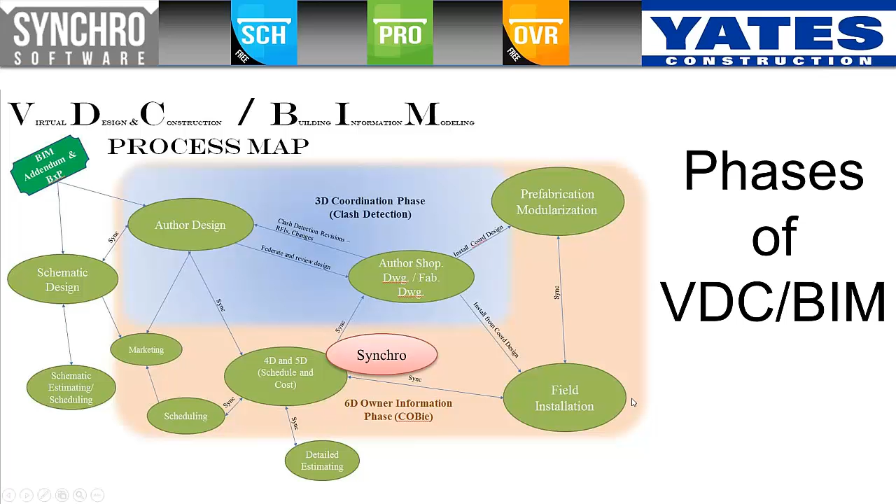If we take all of these parts and pieces, we have our models being produced. I use the BIM Forum LOD specification, and we have these different levels of models. The model isn't all one level of development - you have parts and pieces in there, but as a whole we can think of them at a certain stage of development, knowing there'll be significant exceptions.

Our schedule grows across too. Our estimate grows as the project grows. Our lean practices change as the project grows. And we have different groups of people that are involved as we're going through this.

What we do is try to make as much of this visual as possible. Primarily, the real tools - if we can take the model and schedule and make it visual with Synchro, then people can fall back in and we can get them more involved in the project, get a higher level of commitment, and get more out of them.

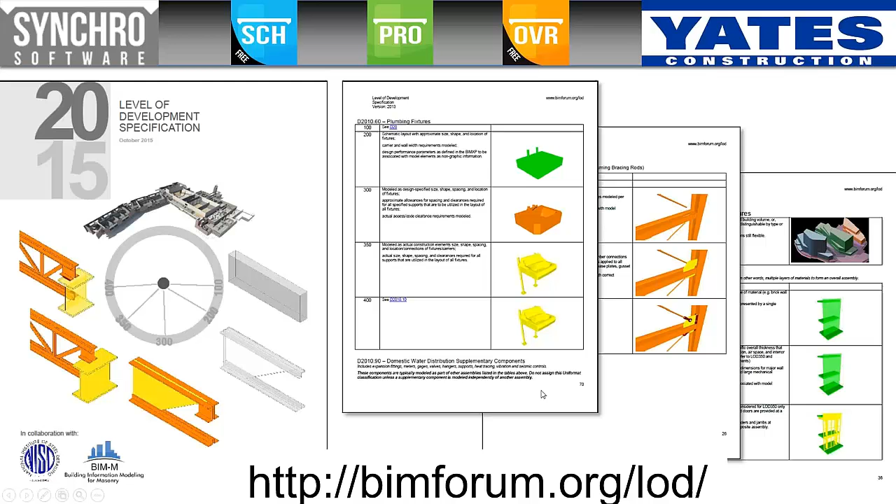So if you're not familiar with the level of development specification, this is what it looks like, and this is where you go to get it. You ought to be familiar with it if you're working with Synchro and these models. As I walk through the different levels of models and development and show you how we use them differently with Synchro, hopefully that will fall into place for you to understand.

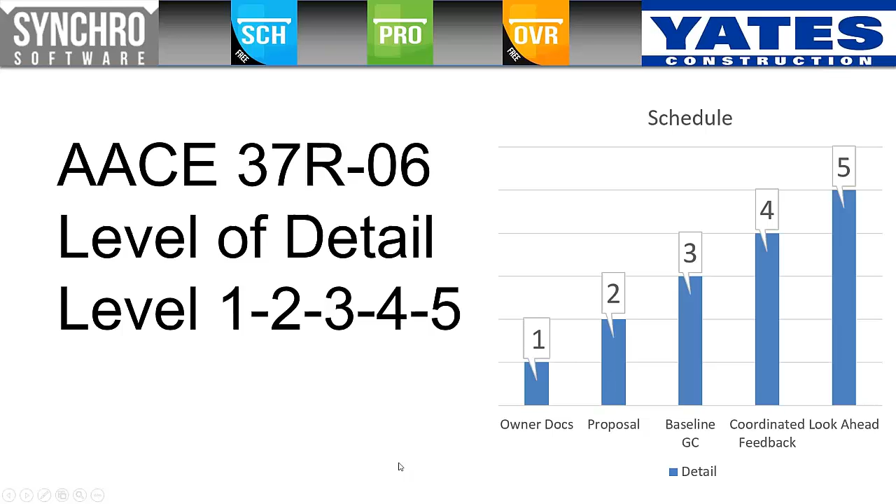As the basis of level of detail of a schedule, I use the AACE 37R06. You can go get this and read it. If you are a scheduler, this is very good to be familiar with to understand how this schedule grows. I have a general outline of about what those look like here, but there's a lot more detail to it that you ought to be familiar with.

That was the familiar-with part, but that's your homework - get out there and read that.

There's a little more detail on that. That's your homework - go read up on that.

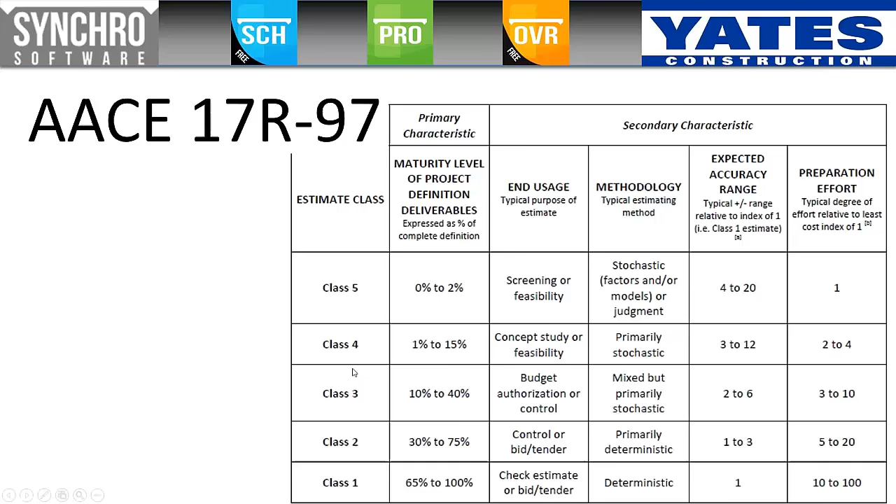The number one cause of project failure is the schedule. You can lose a budget and still make a schedule, but if you lose a schedule, no one ever makes their budget. You've got to have this schedule right, and you've got to be using it.

I'm getting more and more schedulers using Synchro to create and validate their schedules. That's quite the transition in the industry, because there's other software out there people have relied on for years, but it doesn't have the visual component. Converting these schedulers over takes work and effort, mainly because it takes them trying to learn something new. But once they do, the quality of their schedules exponentially changes.

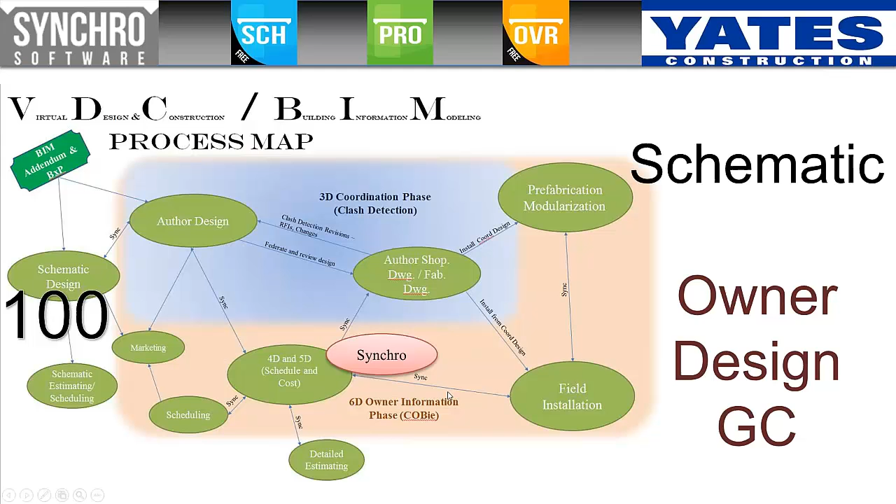Now I'm going to go through these phases and walk through it a little bit. This early schematic, you've got lots of owner, designer, maybe the GC, but we've got to try to understand the basis of the project. At this level, you're going to have a model that looks something like this, they might have dropped it on top of locations.

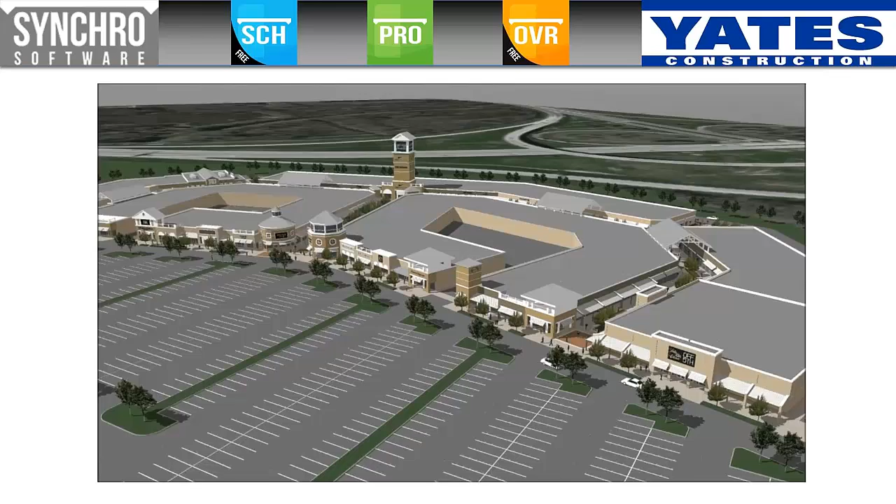Sue, I just want to make sure that video is playing on your side, right? Yes, it is. Great, very schematic. This is probably the SketchUp model, it's an overview. Everything's hollow, it's just an idea of what this is going to look like. That's what this early model is.

At this point in time, wow, we have a model to run with, but when we look at our schedule information, we haven't built a schedule yet. We're just so schematic. All we know is when this has to finish.

Realistically, on that project, we did not know what the start date was until a Tuesday when they said we're starting on Wednesday, because all sorts of things had to come into place. But the whole time we knew it had to be open for Black Friday, and phase one had to finish on the 15th of July, and the other phase had to finish on the 15th of August.

Otherwise, who cares about weather, who cares about delays, strikes? None of that can make a difference. If this project was not open for Black Friday, it doesn't work and everything falls apart.

So you hear people talk about maintaining the schedule so you can get your weather delays. Lots of the projects we work on, yeah, it'd be nice to take a weather delay, but you can't do that to the owner, you just have to figure out how to make it. So at that LOD, you have a level 1 schedule, and there's just not much to model, so I'm going to cruise on past that.

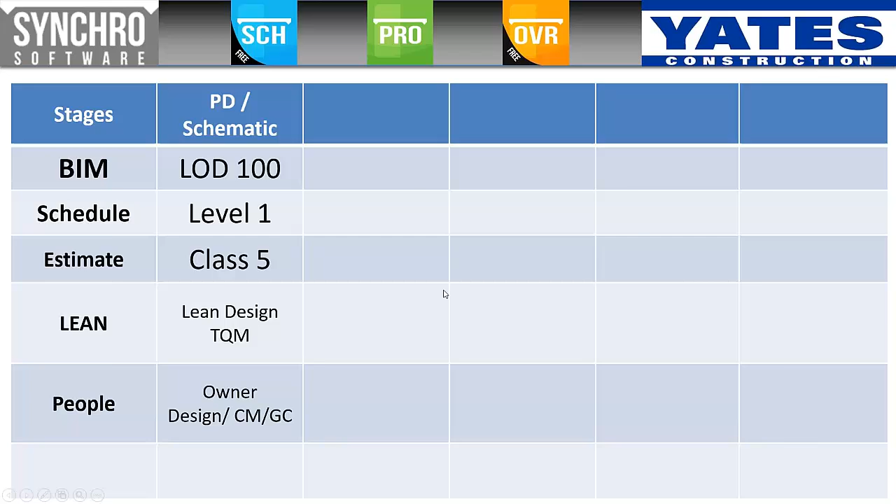This is kind of how everything is fitting together right there, just so you have an overview, and there's a summary. Now let's bump up to 200 to 300. Now at this stage we're authoring the design phase, we're going to have a big mix of models. The real idea is this is a good idea of just kind of a sample of what these design models look like.

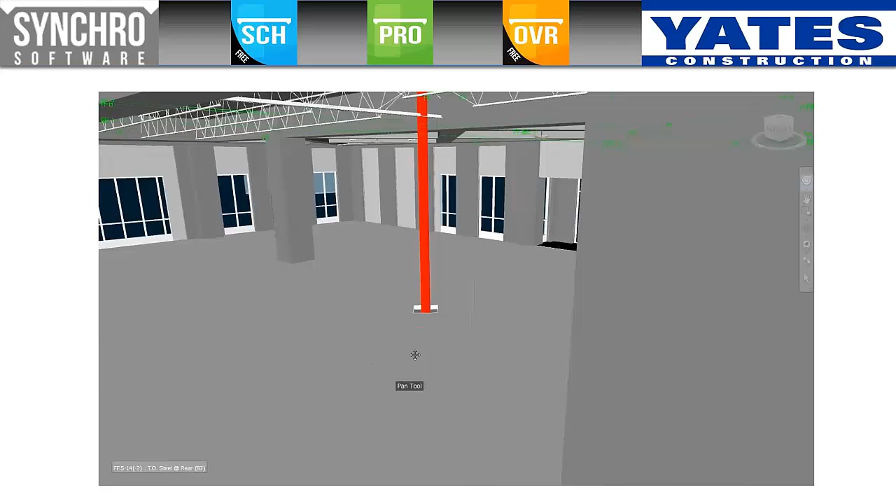These are federated. I've pulled them in. These are different models, getting them from different sources. We try not to create these models ourselves. I want this from the architects, from the engineers, from the people producing the information. Yes, we do create this sometimes, primarily to use with Synchro to create our 4D.

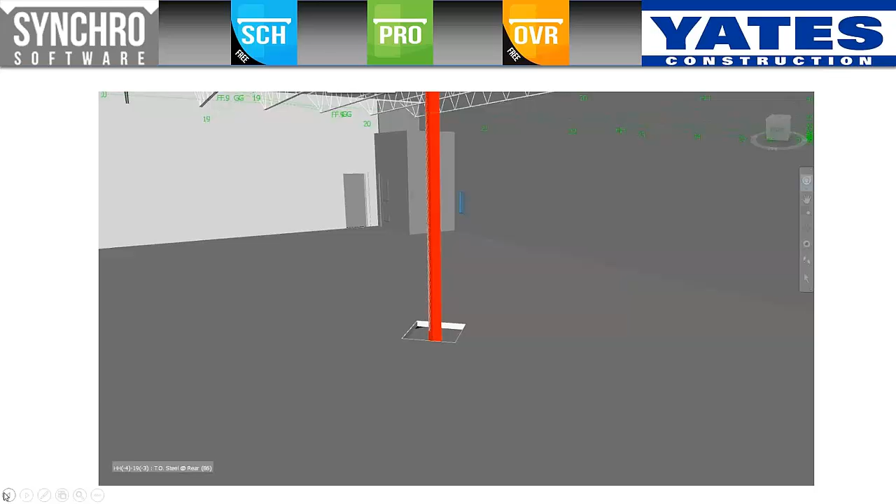Okay, at this page we've got maybe a level 2 bid schedule, 42 line items, pretty simple really. Not a lot here. You see lots of start to start, finish to finish relationships. Very simple schedule - we can't build to this, but it gives an explanation of how we're going to proceed on the project.

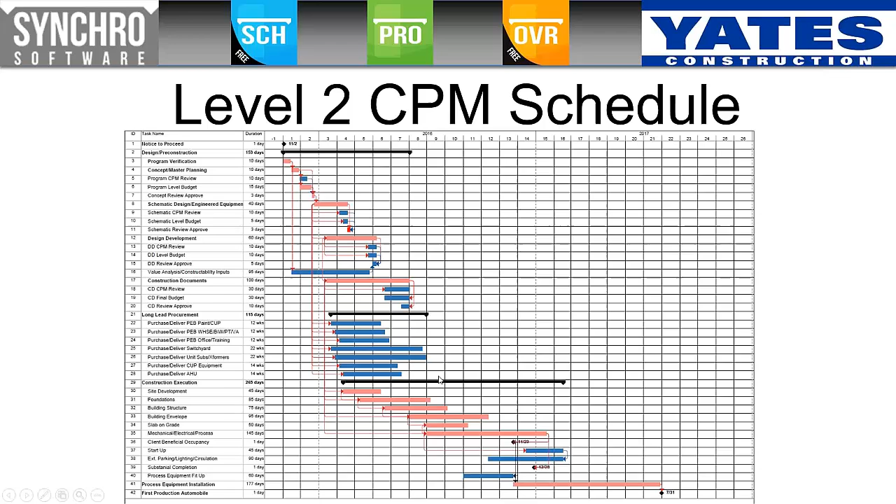Now we also at this phase will be dealing with a level 3 CPM schedule. So on a 50 million dollar project, we can have 3,000 activities - a lot going on. It's going to be broken out by area, phase, location. That's exactly what we're working with and how we're pulling it together.

Okay, and it's best if we can actually get this created in Synchro with the models. I wish I could tell you we had that on 100% of our projects - we're not there yet, we're starting to do that. But lots of times we're still creating the schedule outside and then pulling it in. I hope to change that soon. But if we build it here, it's just more efficient and better.

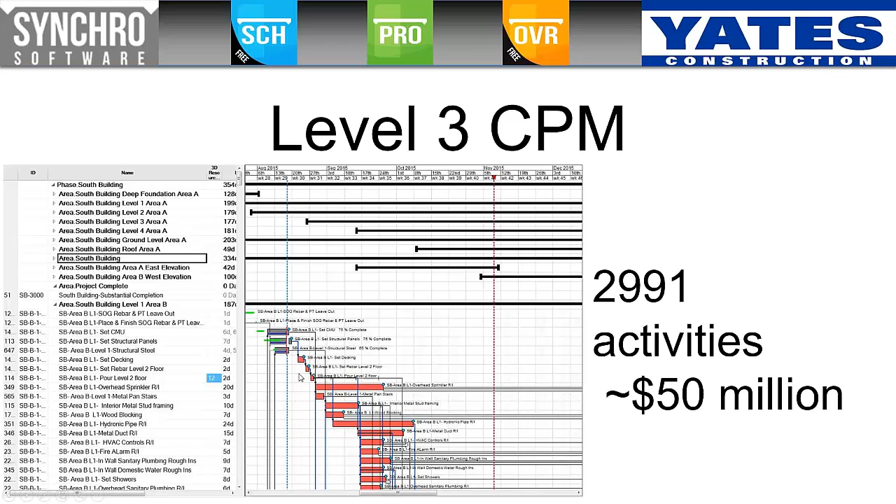All right, so here's a sample of what it looks like. This is kind of a lot of LOD 200 here, not a lot of definition in the models. Part of it is because there's so much remodel, and we don't have some models to work with.

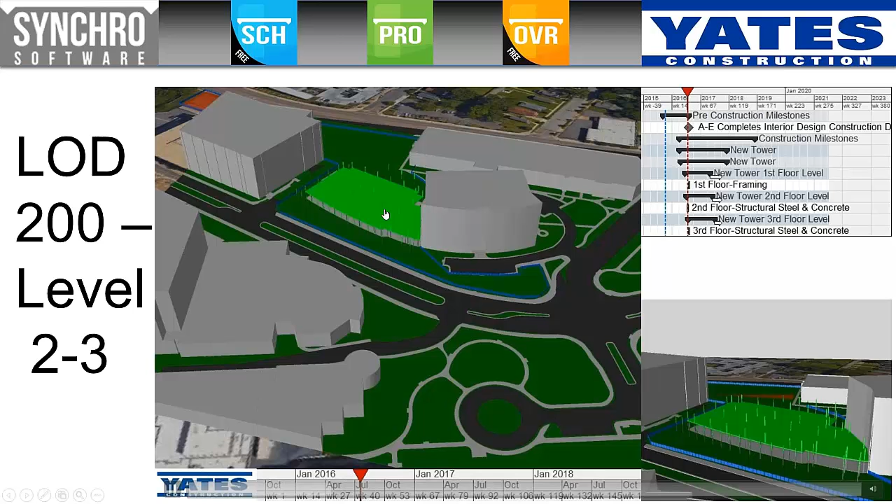And we've taken that level 2 to 3 schedule. It's level 2 on all of the finishes. It's actually a level 3 schedule on our floor slabs and our columns - we have a fair amount of definition there. But later on you'll start to see long bars with finish to finish, start to start relationships, instead of the finish to start relationships we associate with the level 3 schedule.

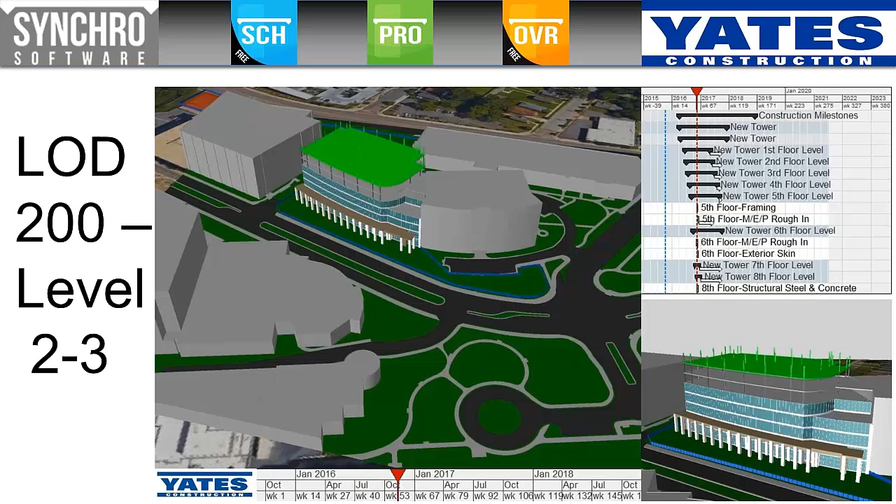And so what this does for us and gets people involved is now the owner is seeing what the schedule looks like. They start to understand dates, they start to understand how it's phased. When I send the schedule out to contractors to bid with and they know the phasing and timing of the project, we have a much better understanding.

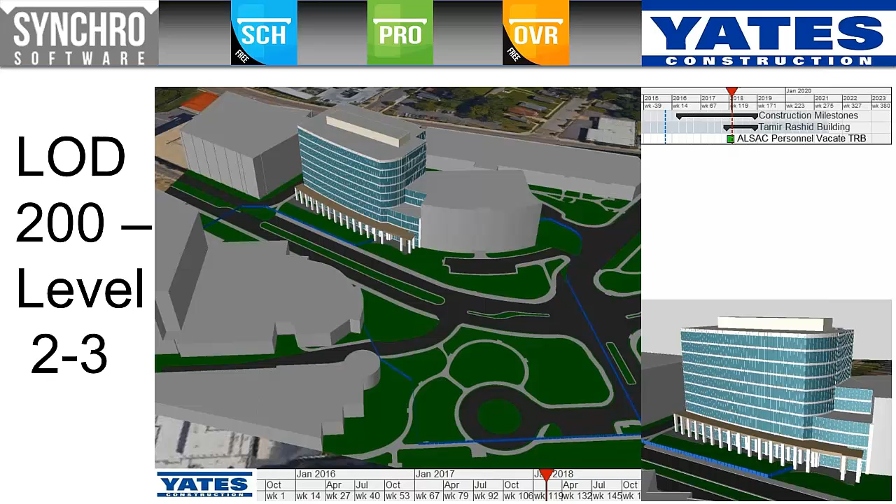And that better understanding means that you get better pricing, less contingency, less risk. They know that we're going to deliver on time and we're not going to accelerate them later on because of someone's lack of planning. We're going to pull everything together.

Being able to see this and understand the schedule, and then, like was pointed out earlier, send the file out there, filter and sort it, let them look at their stuff. The best possible scenario is we send that out there and somebody comes back and tells me it's wrong.

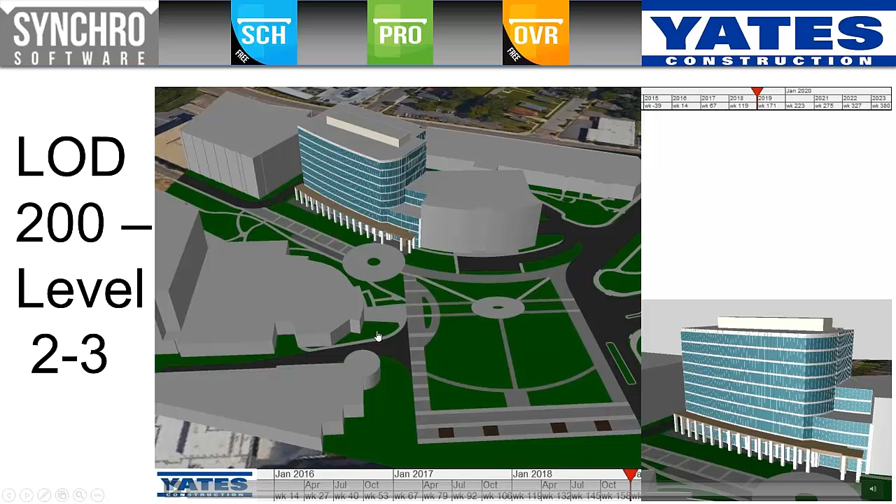Because I want to know that there was a mistake in it. I am not a perfect scheduler, and none of the schedulers that work with me are perfect schedulers. And the more people we have looking at it and they come back and say 'man, that's not going to work' - thank you for letting me know, and then get it fixed. That's the hardest mentality to change among people, is they're scared of someone pointing out a mistake. Once you can open that up, it goes a long way.

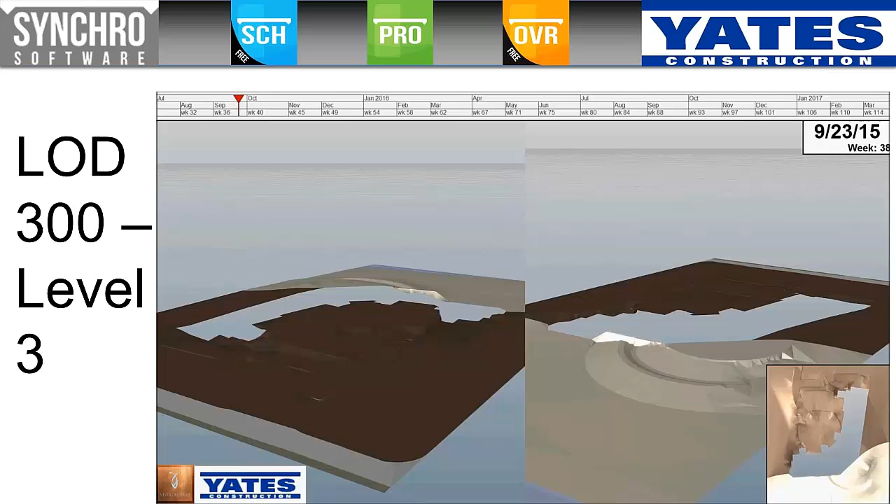Here's another sample project - being able to come here, show two views, have an early schedule, let people see the flow of it and how it looks. Now in the last one, we actually had the bar chart going, there was more detail there for people to work with. This one was more of a visual, different group - more for the owner and some others, and the bar chart wasn't as necessary.

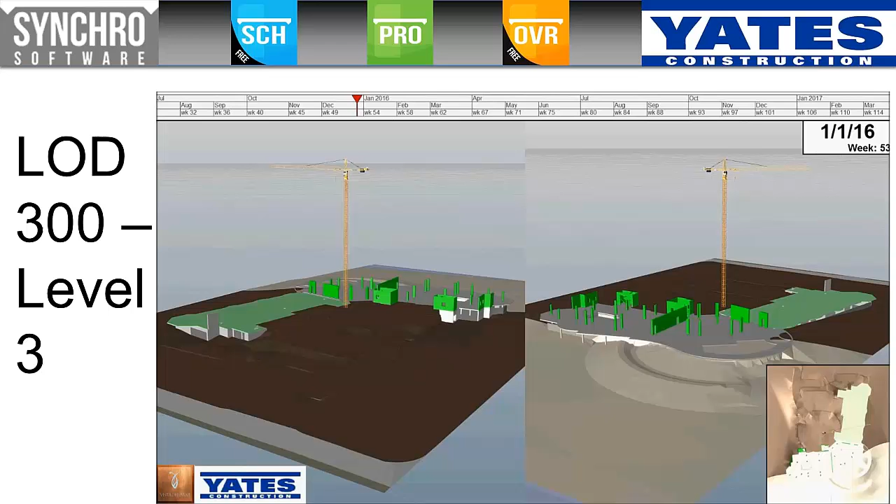We do have this same schedule produced with the bar chart to be able to show the trades and work with them as well. I just don't want to show all the videos and copies of it here, and I wanted to hit that difference in usage there. What we show when we create the video makes a difference. And then, of course, you have the backup file that's published as well.

They can go and open the viewer. If they have Synchro PRO, it's even better, because then they might be editing and sending us back changes - tell us what the changes are. We'll incorporate them, we'll make the schedule better.

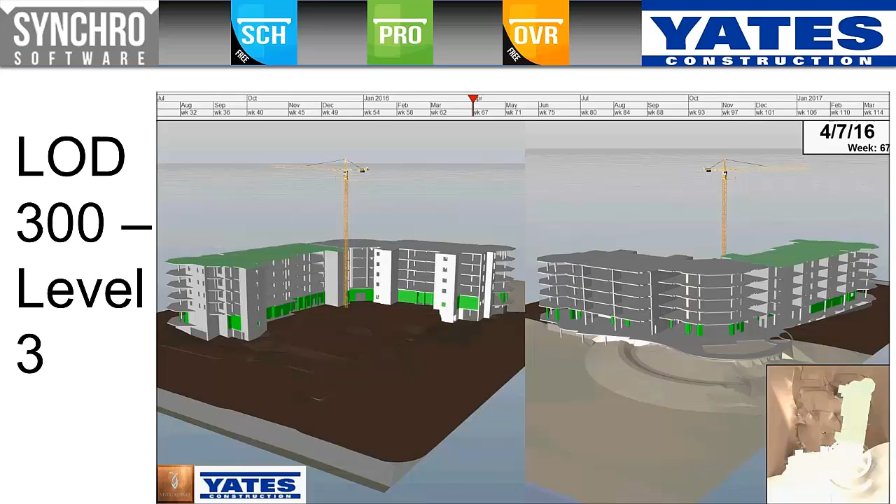All right, I do have one question, Benjamin. Sure, with regard to, do you use this for scenario analysis to...

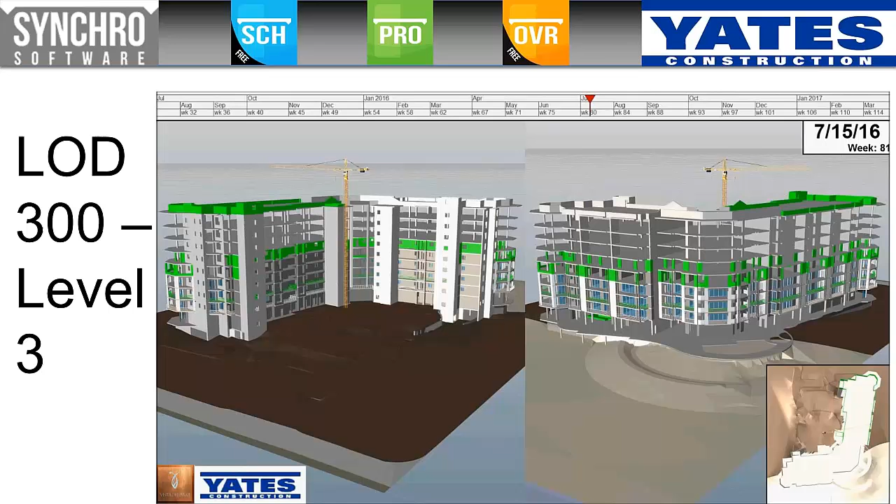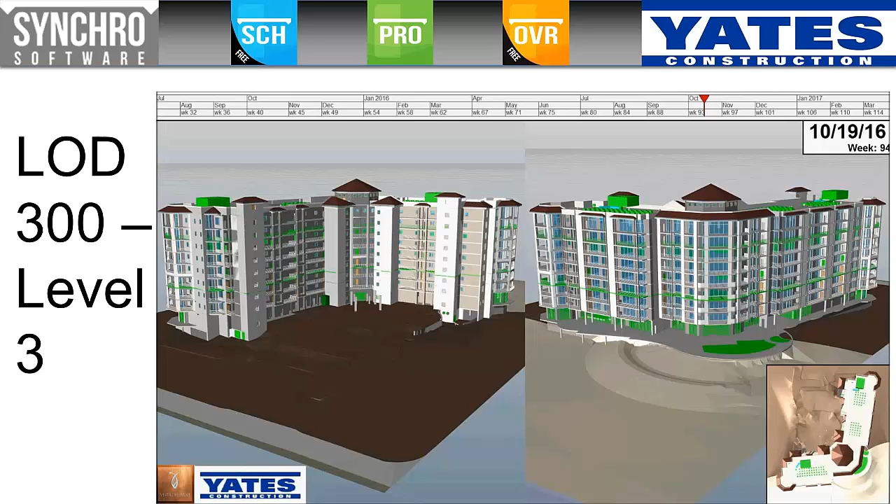Optimize your plan overall? Yes. When we're creating this, every schedule we create is a scenario, and we'll get multiple revisions. Sometimes I'm producing 3 or 4 schedules a day. We have a naming convention with year, month, day, hour, minutes, using 24-hour format, so we can push these schedules back and forth and look at the options and find what works and doesn't work.

Do you think I answered the right question? Yes, thank you. All right. If I didn't, whoever was kind enough to ask that question, please point out or follow up as you'd like.

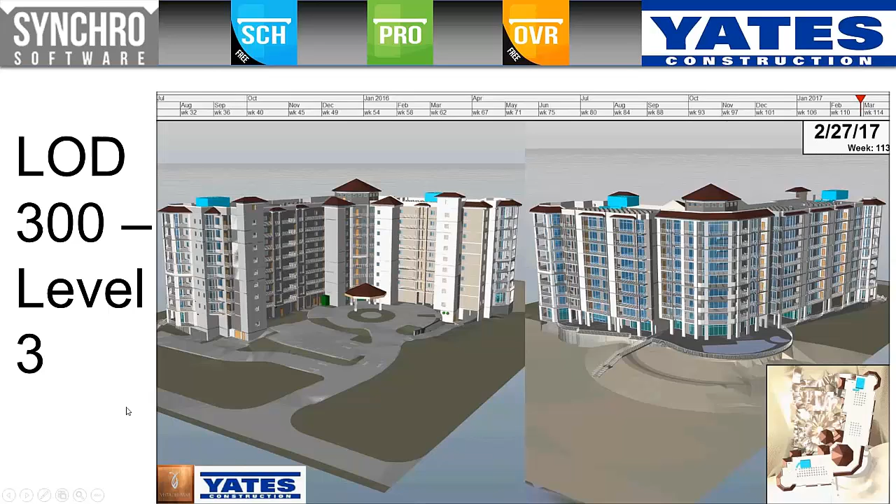At this phase, we have GC pricing or an estimate. Some trades may be on board, some maybe not. We have lots of model quantities to work with. Our lean is kicking into play with target value design, and we're pulling these things together, and we have the owner on board. These are all elements coming into creating our schedule and working with it.

This is a sample of what models look like at a 300 level—we're starting to get into details. We have individual columns, things like that. You don't want to worry about scheduling an individual light fixture, but that's what's neat about these trees. When they come across into Synchro, you can grab a bunch of light fixtures at a time and put them on one activity. You can group them in the right places.

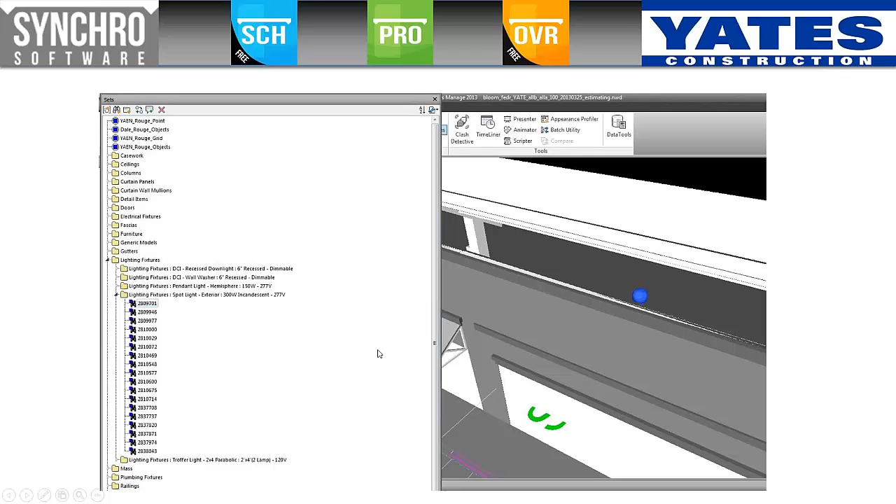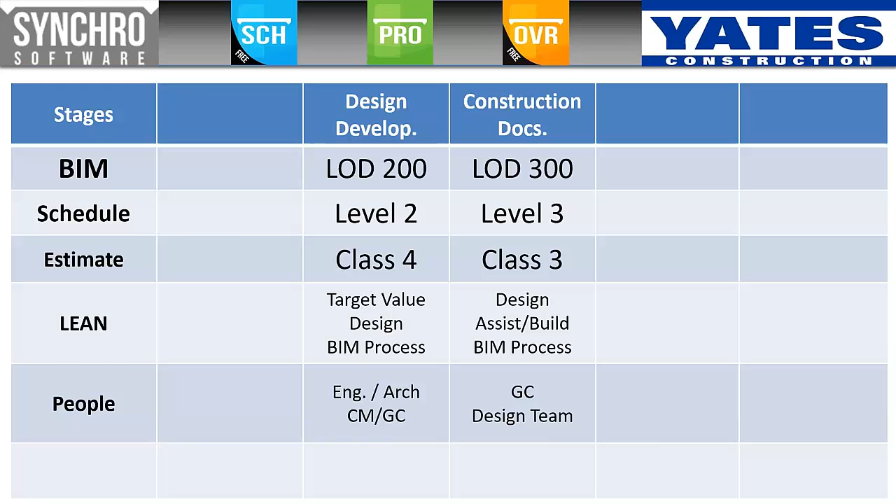All of that comes together in this kind of scenario. You've got some items at 200, some at 300. That schedule is kind of a hybrid, and you use the right level schedule items with the right model development, and you piece it together with the whole intent of this being a visual tool for people to understand and be distributed out there.

Okay, so that was the design authoring phase. Now we're going to roll back into the next phase, the shop model phase. Some people call it shop drawings. I try to focus on it as models that create this information, because when it's models that create this information, we get a lot more detail.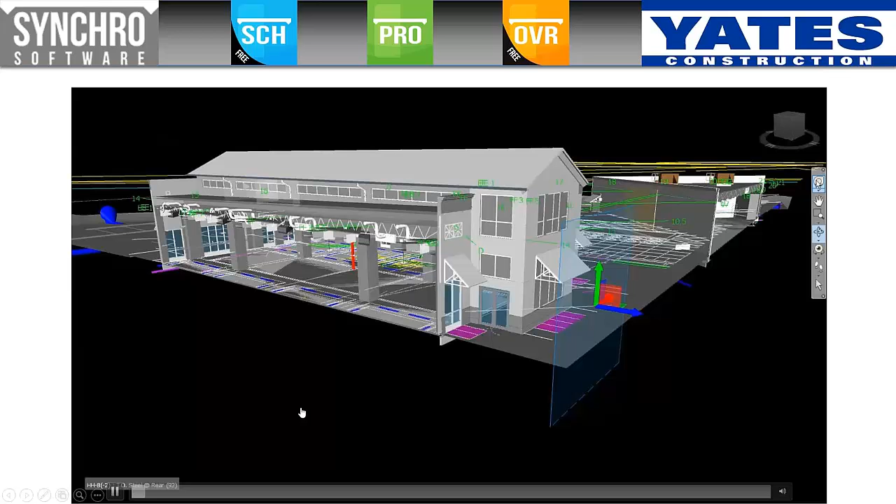Look at how much more—this is the same project I showed earlier for the 200, 300. But here at a level 350, 400, we still have some 200, 300 items in there. The columns are still coming from the structural engineer and designer, so those are still at 300.

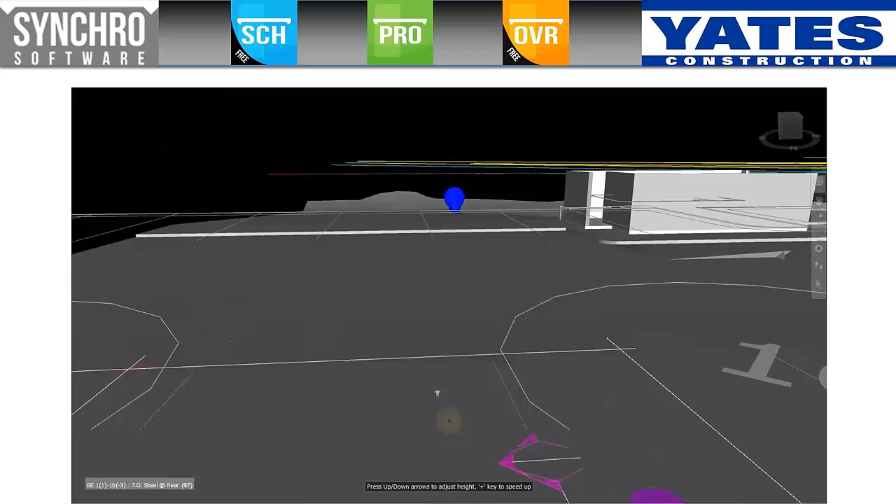But now we've mixed in a whole bunch of level 400 things—outlets for the drainage, some curb and gutter mixed in there, canopies. Let's flip back inside the building. We still don't have actual bar joists, but it is growing, and we're getting a higher definition of our model.

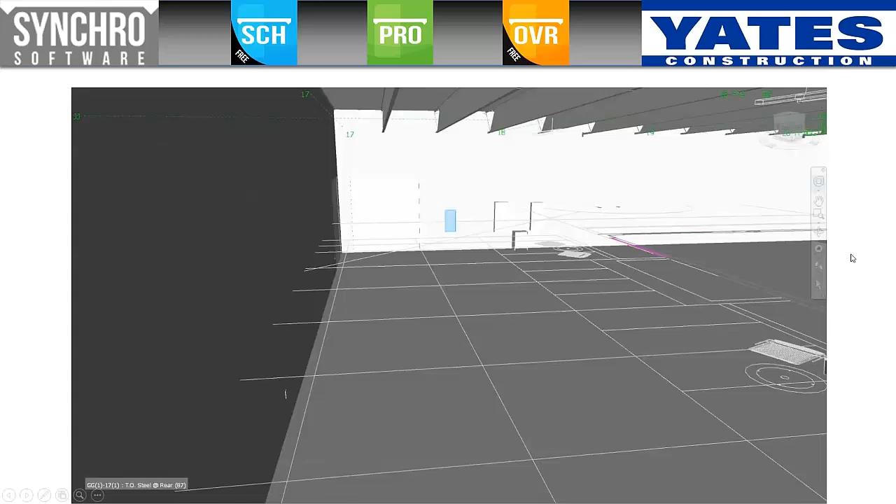That also means we start to develop a level 4 CPM. Now what happens here is, yeah, the activities are still going to be around 3,000, but the big difference is trade feedback. We haven't just dictated the schedule—we've created it in Synchro and published it for people to look at with the viewer, and they can get in there and see things. They start coming back to us with corrections.

If that HVAC contractor comes back and says, 'There is no way I can do all that HVAC work in building 200 in 7 days, that's going to take me 12 days,' I say, thank you for letting me know. Some people would say, no, just get it done, but that's not realistic, that's not collaborative, and that's proven over the last 50 years to cause problems on projects. What we say is, thank you. We work to see, can we actually allow him the 12 days? Is there room to do that?

If we just say 'get it done,' chances are it's actually going to take 12 to 15 days because we didn't plan for it. We're just lying to ourselves. But if we open this up and get their feedback and make adjustments, maybe we break the area down into two 6-day activities so the trade behind can come in and start their work, staggering it in smaller chunks. We still keep our finish-to-start relationships and trade flow, and don't force them to work on top of each other.

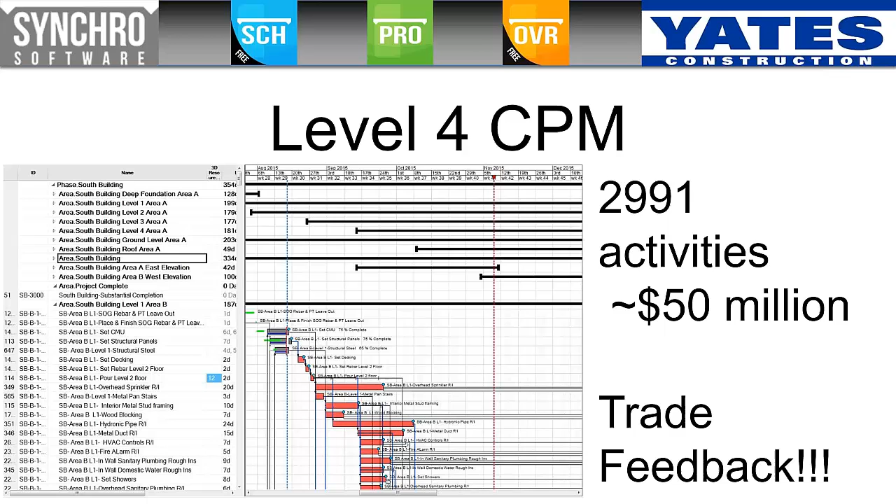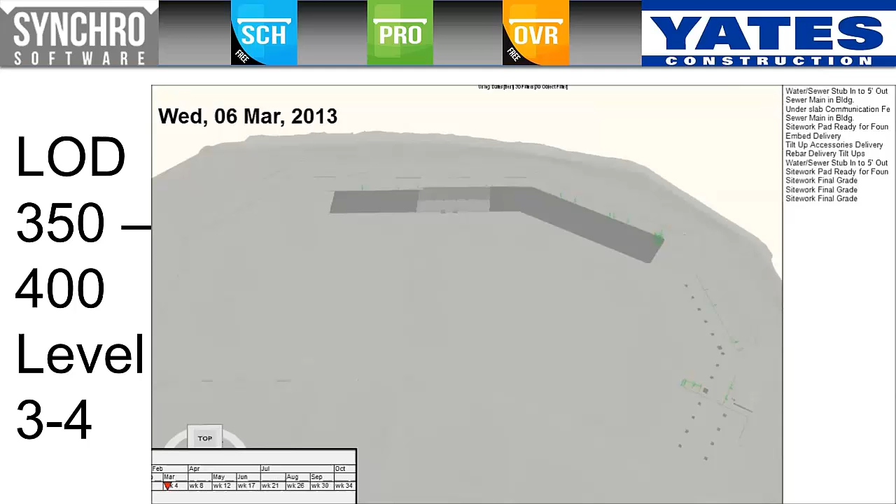Then they can go look at the model, see their level 400 model, see where people are working and how, and we can start to pull logistics into it. That's something that never could have been done before Synchro existed. You just couldn't schedule logistics like that—there wasn't enough brain power on this planet to schedule logistics on paper without visuals. But now with Synchro and visualization, you can truly start to do it.

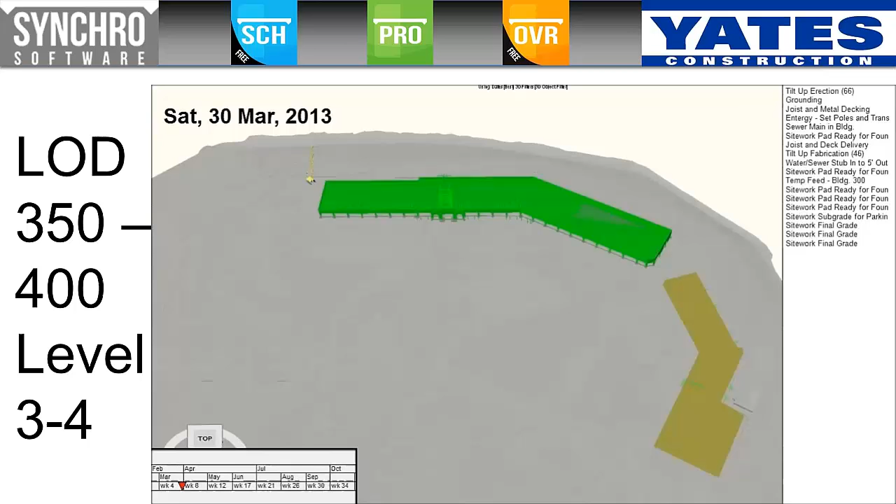So let me introduce you to the building. You've seen model shots and schedules for this outlet mall as we've gone through. It's 5 different separate buildings that produce this outlet mall. You see here the first 2 coming into play—simple access and simple logistics dictated which order to put those in.

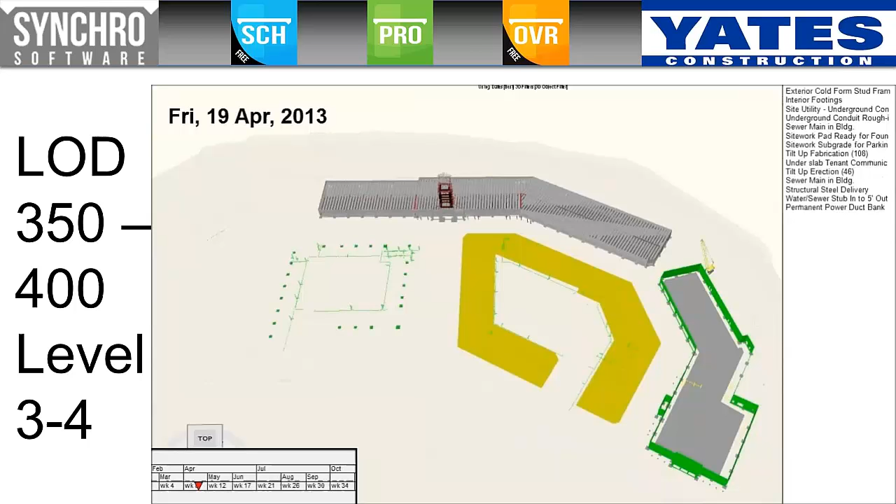But then we had to come in and put those cranes in place, because you're going to start to see some really tight locations. While this crane path is just showing the cranes moving, I actually spent hours verifying that the crane did fit, right there and right there, in those locations. We had 18 inches on each side when the crane went through there—it was fairly tight. Now let me go back just a little bit.

So the side effect of what happened—I had to make sure the cranes fit and show a general path of how they worked.

Now, the first time I showed this, the superintendent cussed me up and down: 'Crosby, your stupid schedule and all your stupid fancy stuff—you don't know that we're not going to have 5 cranes on this project?'

So I just said, alright, thank you very much for letting me know, I appreciate that. Let's walk back through this a little bit. I started up here with him on the schedule. I think he was still huffing and puffing a little bit, and I said, thank you for telling me this is wrong. Up here, are we going to be setting air handling units on this building?

He's like, yeah, we're going to be doing that. I said, don't you need a crane to do that? He said, yeah, but it's not going to be a big crane like that—it's going to be a rubber tire crane. I said, hey, I'm sorry, my mistake, I should have put a different crane in there.

I was actually kind of cheating, because it was so simple in Synchro to put one crane in, copy it, and move it, that I didn't go put another one in. It didn't take me that long to fix it for later, but I was just shortcutting a little bit. I admitted, okay, I had that wrong.

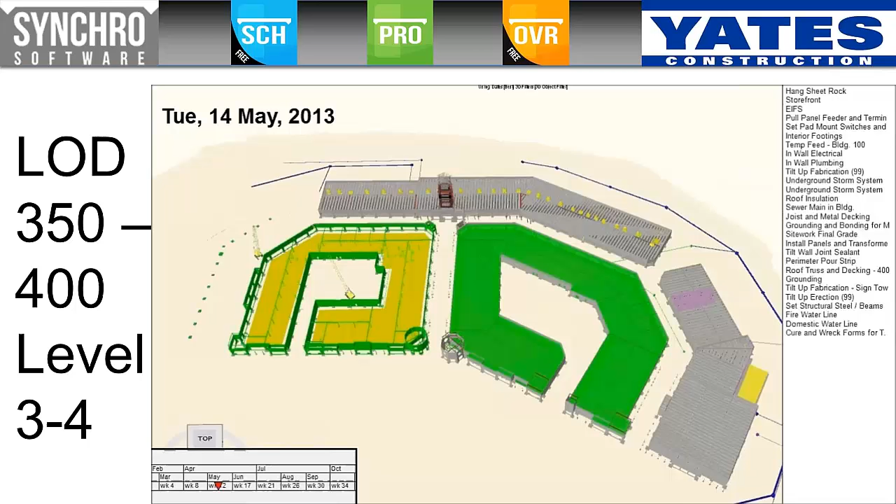Okay, now here's another usage. Once again, now we're at level 400. We're at a fabrication level schedule, producing 6-week look-aheads so the trades can dig in and see it.

Now I like showing this one because it's a poor presentation on a webinar. Nothing's happening here. Everybody watching this is looking right now trying to figure out what in the world is even changing. That is perfect for a 6-week look-ahead.

These guys out there saw this 6-week look-ahead and said, how come nothing's happening? We said, because none of you are doing much work during this period of time. They said, why not? Because you're all over in the other building on this campus. So let's get you back in this building.

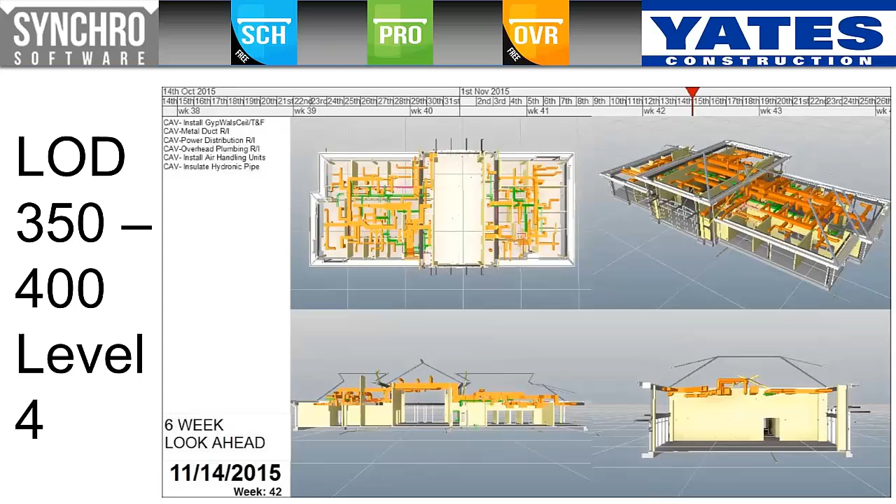Where are your trades? Where are your crews? Why couldn't we be doing more work in this building during that period of the 6-week look-ahead? We were able to get more people in there and get this building done faster. Those are the sort of things that cause great conversations. You produce the schedule, you publish it, and when people look at it, they start to see things.

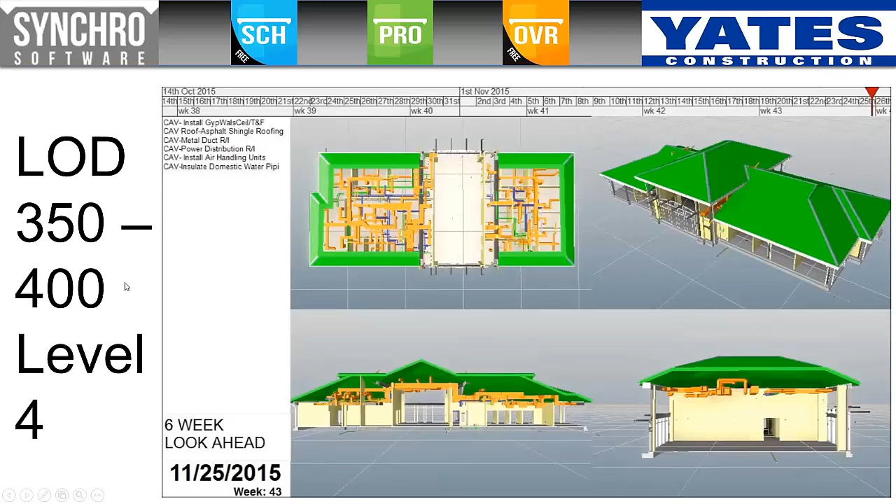This is an idea of what your models look like at that 400 level phase. These were the models we were working with. This is another project right there - it was the other part of the one I just showed you. Lots of detail. Steel is in there. All of the trusses are up there as pieces.

You can see the federation that took place in that model. All of these different files were in there, and all of them were then pulled into Synchro. And yes, Synchro is heavy, and you had to work with it - you had to be patient with it a little bit - but it was well worth the effort.

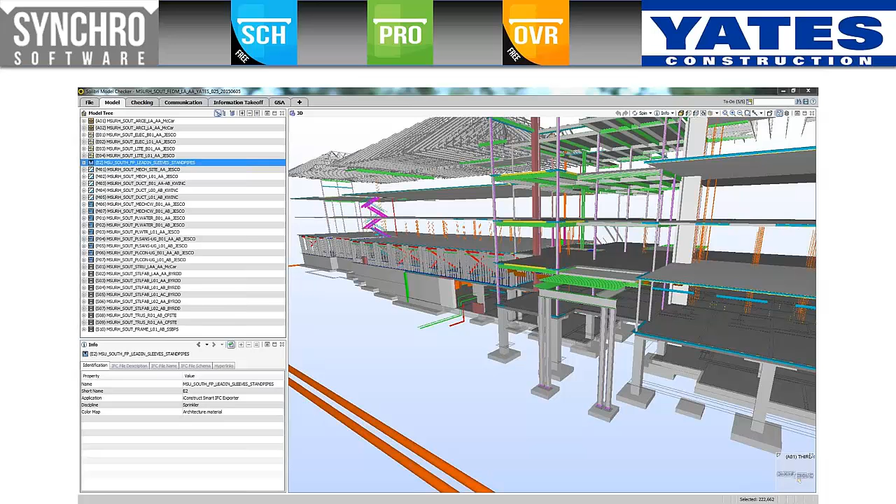And of course, filter it down a little bit. So now we are at 350, 400. Our schedule, level 4, we've gotten that feedback. People are buying into this schedule. They're building the schedule, they're using it. We love it. We're really getting into our last planner pull planning in order to create this level 4 schedule.

And we're visualizing it. The trades are all in there. Everybody's on board. The owner, they're looking at the schedule from time to time, but they really just want their building built.

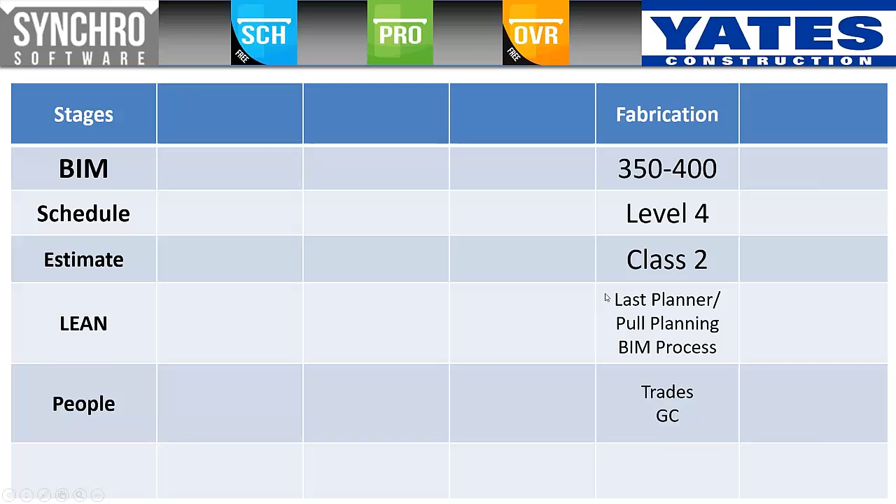Okay, that's what was happening at 350, 400. Now let's start rolling into the last phase, field installation, actually getting out there in the field. Getting it to where you have your Synchro model and your steel erection, and you're actually taking pictures and comparing them back and forth to verify.

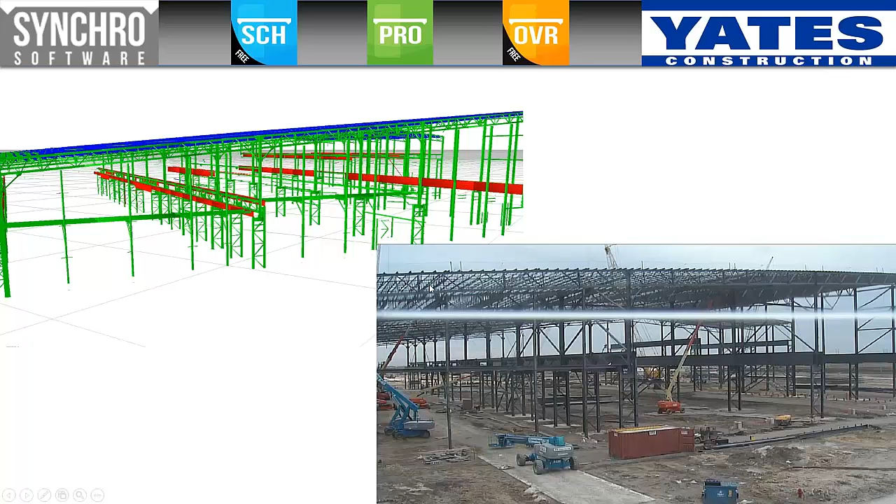Yes, we are on track. We're where we need to be. Now you can do that with the schedule update and things like that, but when you can produce a picture like this and publish it for the team, they love it. We're on track, we're ahead of schedule. We just haven't had the schedule problems that you used to have to deal with and overcome in the past. Now we just meet the schedule or even beat it.

But now with this, at that field installation, you start talking about a level 5 CPM. Now they'll do a level 5 CPM all day back and forth for shutdowns, but I personally haven't been involved in a lot of shutdowns. So what does level 5 mean to me? My level 5 comes off of the piece of paper, it's too much to run that in the schedule itself. Okay, this is where our lean last planner comes into play, and that's where we implement it.

So we have our last planner board. People are up there, they're putting up their Post-it notes, they're scheduling day to day. And just before they get up there to do this on a regular basis, we're showing them that same 6-week look ahead. We're walking them through the schedule to say, hey, this is what the schedule says we're doing. And then they have a better understanding of their own schedule coming up over the next 6 weeks.

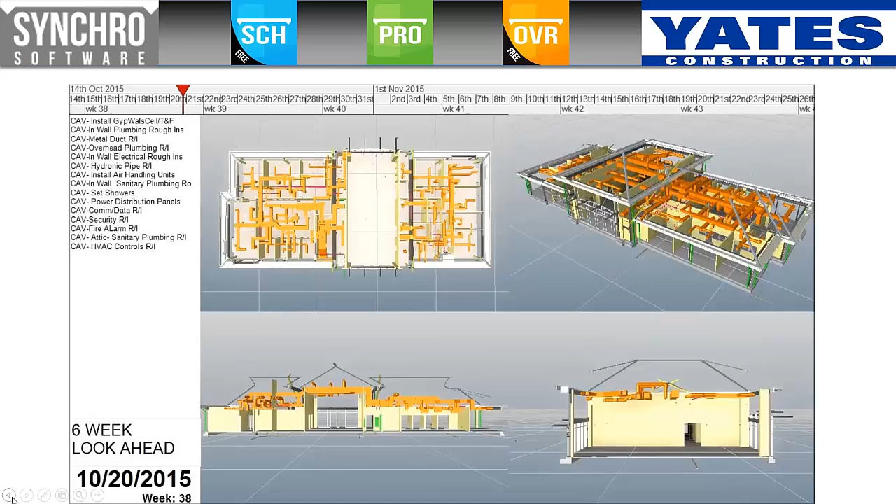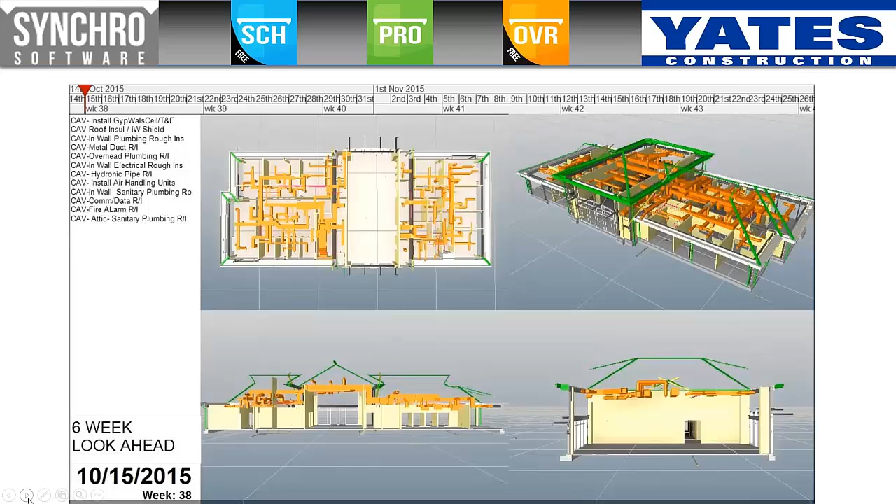I'm not waiting for them to flip through a bar chart. They come up here on the wall and they make real adjustments based on that schedule. Then you have a scheduler, a project manager that's tying those adjustments back into Synchro so that it's ready to go for the next week. But we're keeping them involved and we're really working them. And the subs, the trades, absolutely love it.

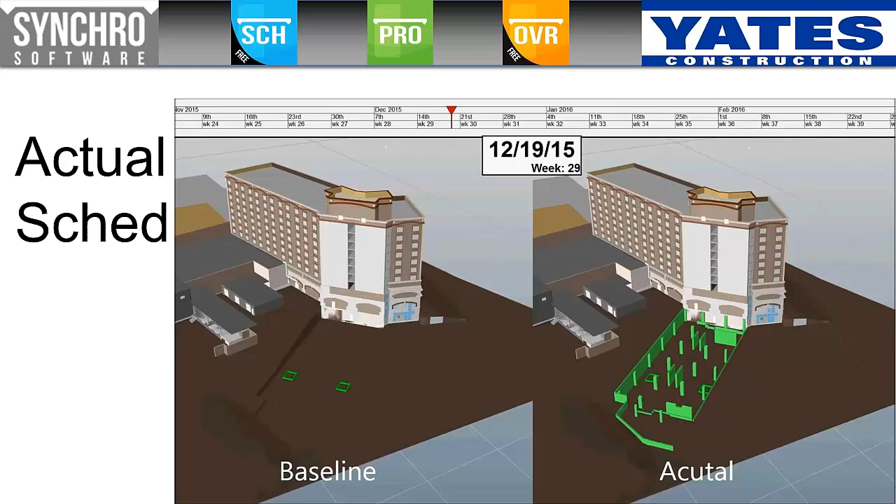Here's another one, taking the actual schedule and pushing play on it with the baseline versus the current. And you can see the actual, it's ahead. They started that earthwork ahead of time. They came in, they started going in here. They'll start seeing the footings and some of the walls appear ahead of time. They were doing great, everything was going wonderful till they got to the first slab.

Now you can see nothing's happening on the actual. It was like an extra 2 weeks in there. There was questions that hadn't been resolved on those slabs. So then the real part of this one that was magic for us was we get here and the team says, yeah, we're caught up, because they got caught up on their slabs.

But were they actually caught up? No. This video showed them that yes, they caught up on the slabs, but in their effort to catch up on slabs, they had not caught up on their enclosure. Now, all of a sudden, it's visual. Now they understand it. So they're feeling like everything was good, but we showed them it's not as good as it should be. We can do a little bit better.

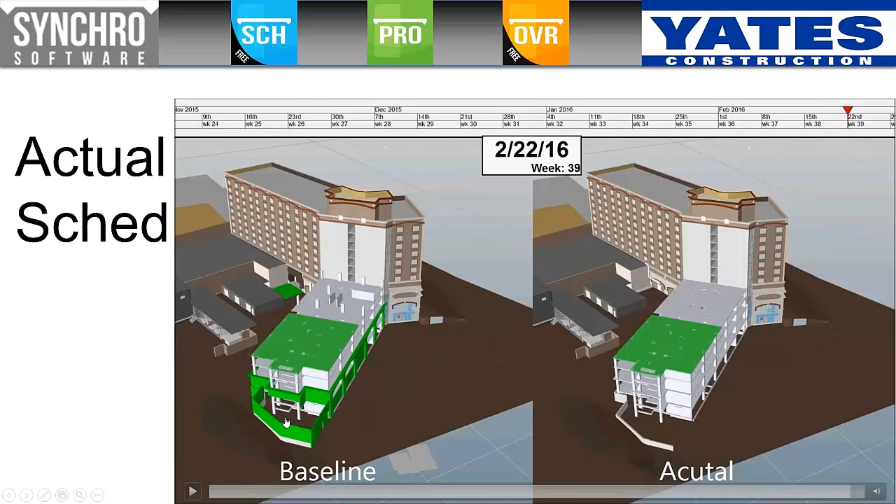So then we roll forward, and we go back to our last planner system, and we hit it up again, and we dive into our weekly work plans, and we start talking about why did we not have things done, what can we do to get things done, how do we make that happen, with an entire focus of this idea: install per the model documents or take it out. Follow the CPM schedule, follow the Synchro schedule, be involved in it, understand what's going on your project.

We are in the field, we've figured all of these things out, all you have to do is make it happen. And the last planner takes away a lot of the field issues that then come up, things you can't put in a schedule. Like one project, they were driving piles early on in the project, had the pile rig there.

The guy that was operating the pile rig had a heart attack. I mean, it was just, nobody can anticipate that. It took 2.5 weeks to find somebody else that could operate that rig.

We were down 2.5 weeks on that project and on that schedule. So how do you overcome that? Well, by having Synchro there for people to understand it, know their schedule, and then put that on a last planner board, we actually recovered that 2.5 weeks in real time over the next 3 months.

So, installation, we're at a level 500. Our schedule, we've got level 5, and it is highly visual. We're talking about last planner. We've got our foremen, our superintendents up there. We know what our pricing is. We're making sure we're not spending extra money on overtime. We know what we're doing. We're spending the money where we want to spend the money.

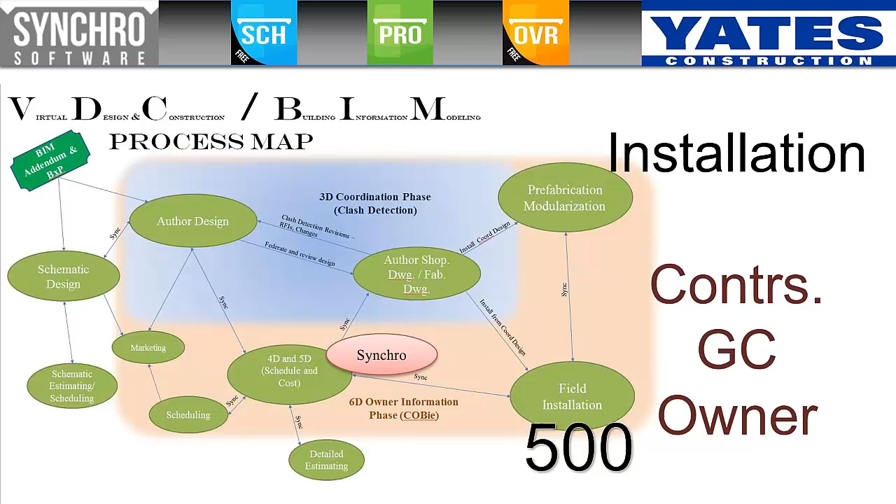It's all coming together for us. The contractors are all on board. The GC's on board. The owner is getting the project they want. So as our model grows with the project, Synchro comes right in here. And we sync that with our field installation, with our models, and with the fabrication level information. We pull all this together and use it as a common hub of information to get people involved.

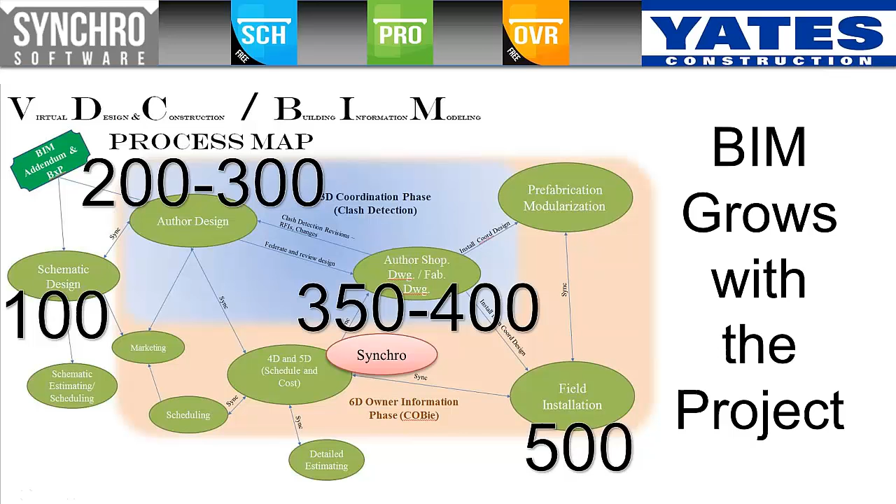Here's kind of an overview of the individual slides that I'd walk through. Everything kind of fits in its place and lines up.

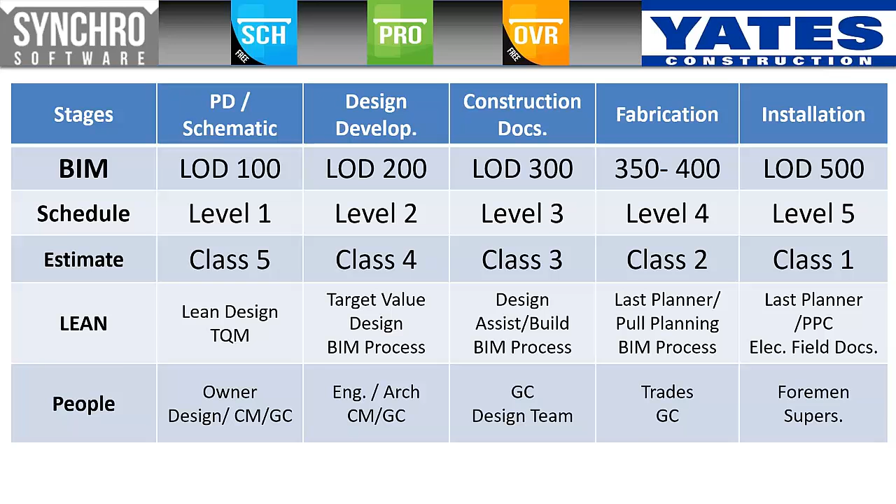Early on when I was getting started, I kept trying to take a level 4 schedule and work with a level 100 model and do all those sort of things. Once I started to line this up, things came together. Because as that schedule grows and Synchro comes into play, we use this to bridge the gap and get the communication out in the field.

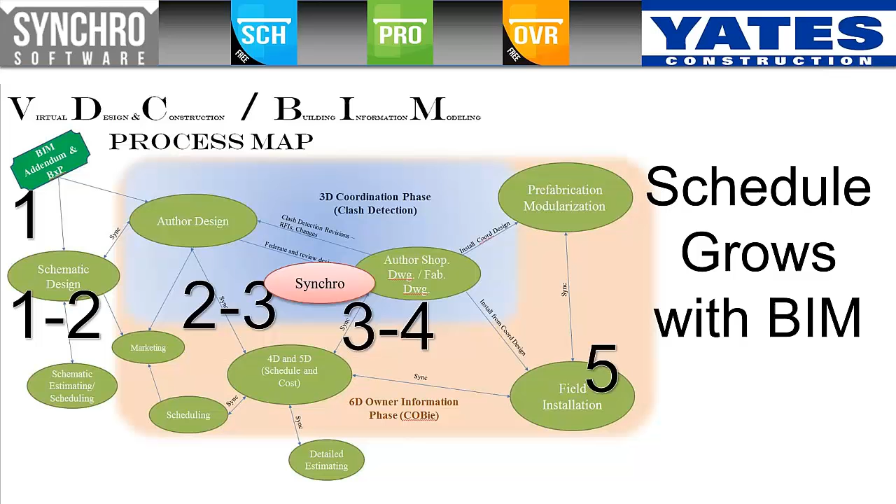So then we start to see all of these people getting involved. In the past, I probably would have had some project management in the schedule, some superintendents, a few of my contractors and consultants, and the schedulers. But when I can play that in a 4D scenario, I start to have all of these people in there. And all of these people start to get involved, and they start to improve my schedule.

So as far as I'm concerned, Synchro is making the difference for us. It's getting people to understand the information. It's getting us the efficiency and the productivity that we're after, and pulls it all together. And so what we start ending up with is clients that are exceptionally happy with us.

So if we were in an interview with the clients, getting ready for some stuff, and we asked him what his thoughts were on all of this BIM stuff and schedule stuff we've been doing for him, this was his comment back to us: 'I don't think there should be any doubts, having gone through it, that you would use more BIM.' So what he was saying is dig deeper, do a little bit more, apply it, get more people involved, and really use it.

And so that was the information that I had for today. Sue, were there any other questions that have come along, or any questions that you guys would like to add in as a follow-up to finish up what we're talking about this morning?